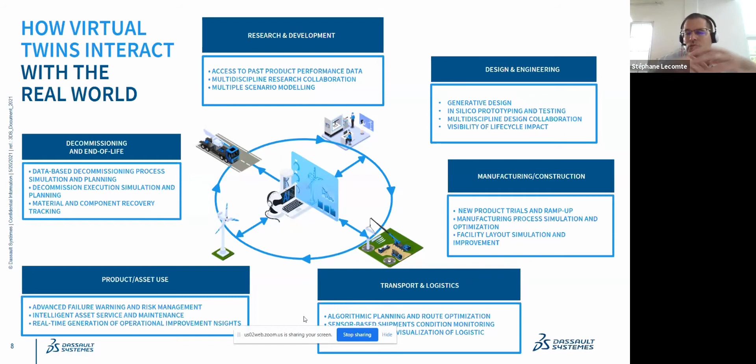And then you have some kind of system to help us do proactive and preventive maintenance, ensuring that you have access to the risk assessment and you can trigger some real-time information in order to have better insight into the operation of the asset itself. And of course, this virtual twin environment will help you take the decision to support the decommissioning of the asset as well as the end of life.

And as soon as you are able to ensure that you have access to lots of data, you can prepare the decommissioning of the end of life of the asset earlier in the design process. Okay, so this twin has a positive impact on the different aspects of what you want to do.

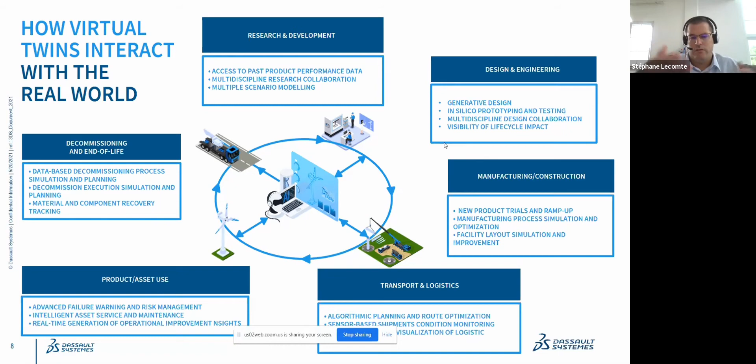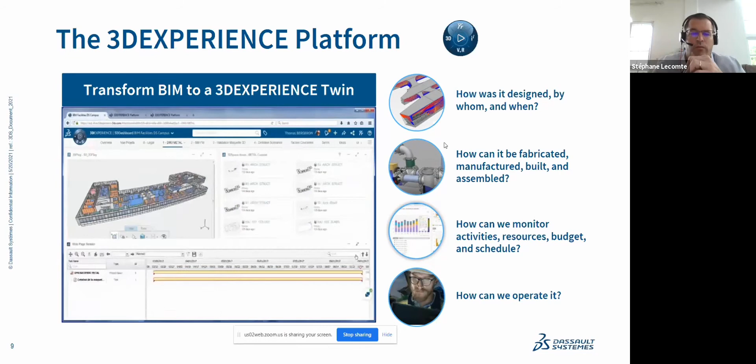As an example, here we are showing you that in order to leverage this twin, of course, you have access to a 3D digital environment in order for you to understand the way it has been designed. Okay, so you have access to a geolocalized environment. You can zoom from the building level, the city level, the district level, and you have all the multiple domains that are interconnected. So you mix the 2D environment, the 3D environment, the project environment, and you have access to the different KPIs in order to help you to decide what are the best suppliers, the best contractor you need to work with in order to deploy and fabricate what has been planned.

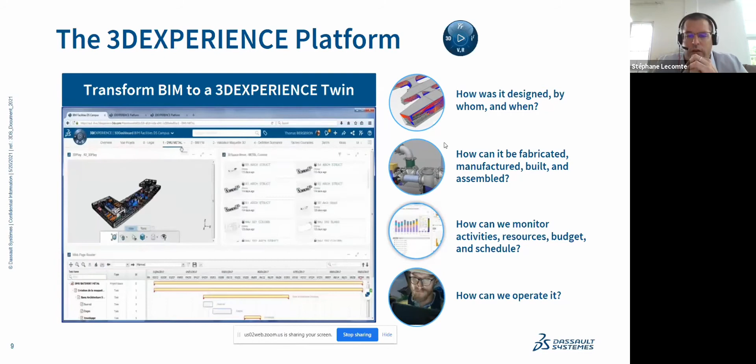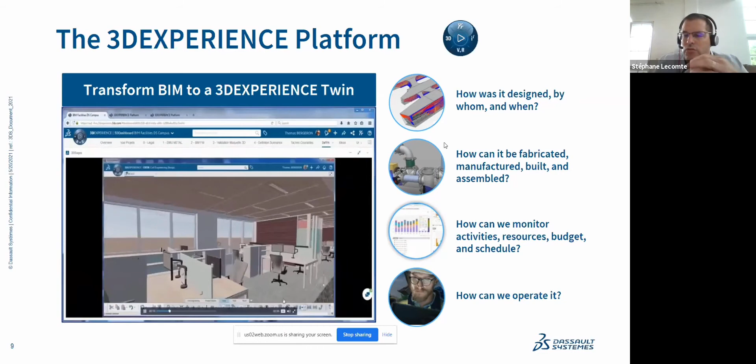Okay, you can see here, you can navigate with a high level of detail at the level of the equipment, and you can trigger some work instruction in order to ensure that you can afterwards operate it. So you have the multiple levels of detail, you have the multiple information. You can connect the virtual world with the real world. So here you have the real asset, the real pump, and you ensure that you can connect this real asset to the virtual twin, and you can do some virtual training, virtual commissioning, and you can understand the way it has been done.

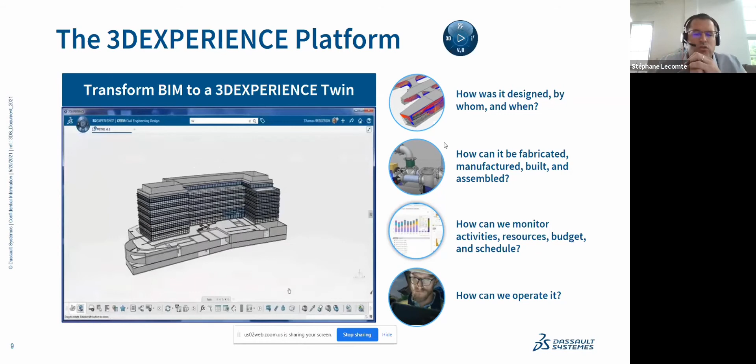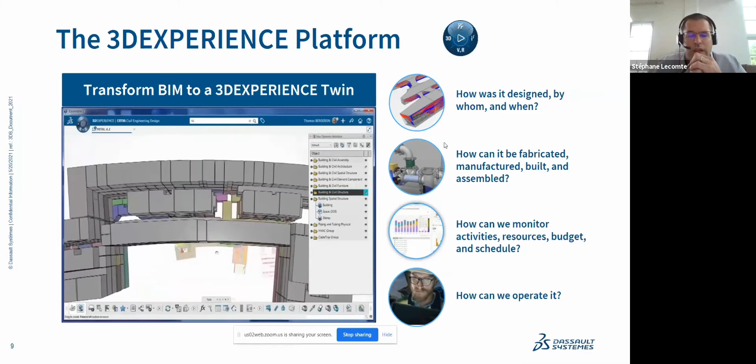Okay. After, the goal of this virtual environment is to support the next generation and to support the ideation in terms of a new generation of equipment. Okay, so here again, through the virtual twin, you have access to the different equipment. You can isolate some element, you can validate some other element, and here you have access to different zoning on the way it has been done.

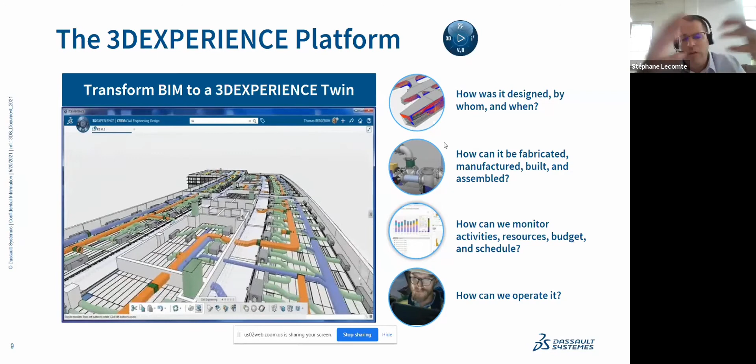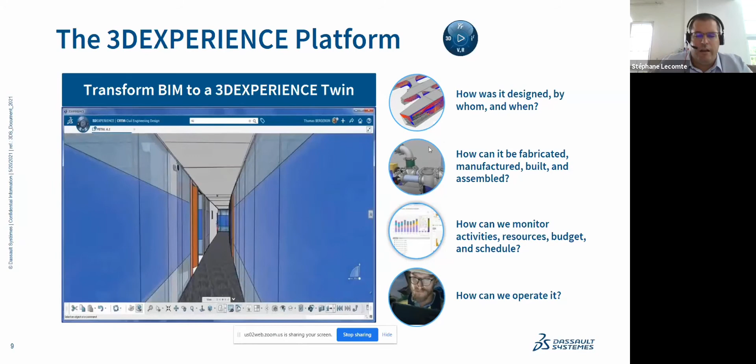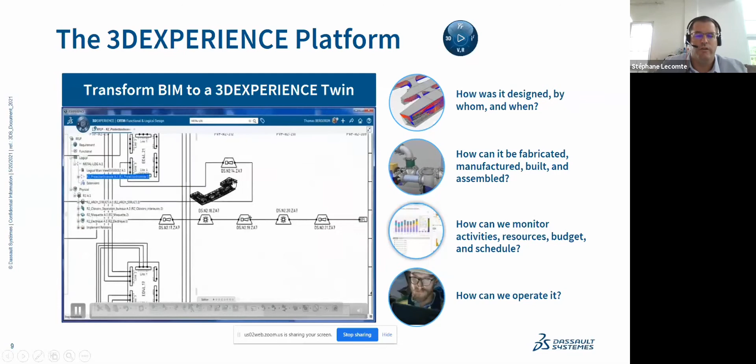Okay, and after that, in this digital mockup, you can have a virtual navigation in order to do this kind of measurement, to do this kind of simulation, and in order to navigate here in the HVAC system at the level of the building. Okay, so everything here is done in such a way that this virtual twin is interacting with the different systems. So here you have the different safety equipment, you have different pump network, you have the safety alert, and after you are able, through this digital twin, to leverage the way you want to operate it.

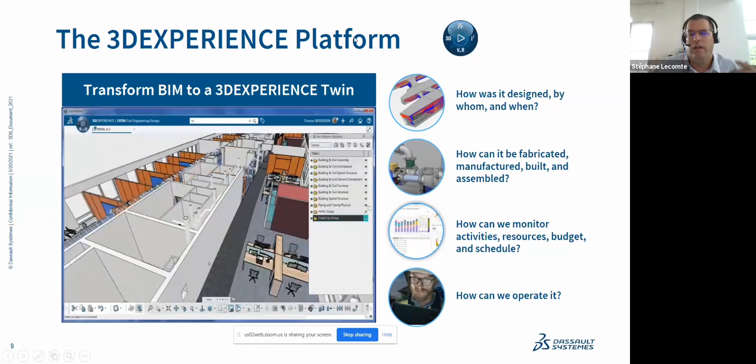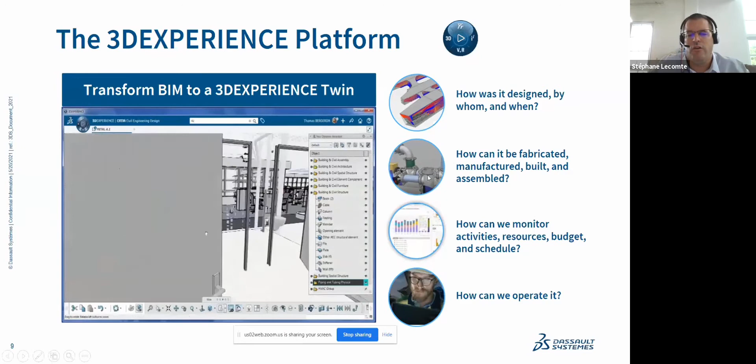Okay, so takeaway, the twin enables you to understand the way it has been designed. It enables you to understand the way you will manufacture it and the way it has been built, in order to ensure that you can optimize the way you will operate it, in order to monitor the activities, in order to have at the end of the day a positive impact on the way you will operate it.

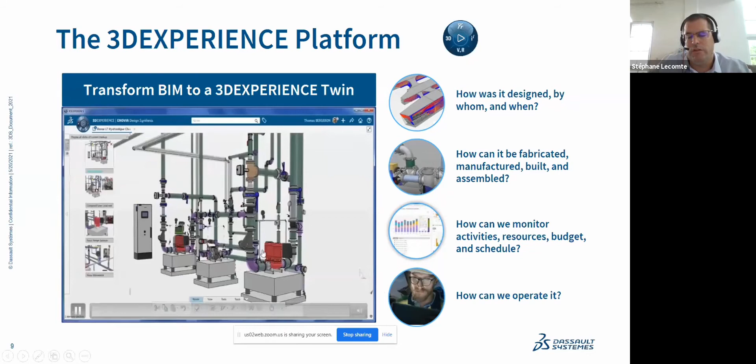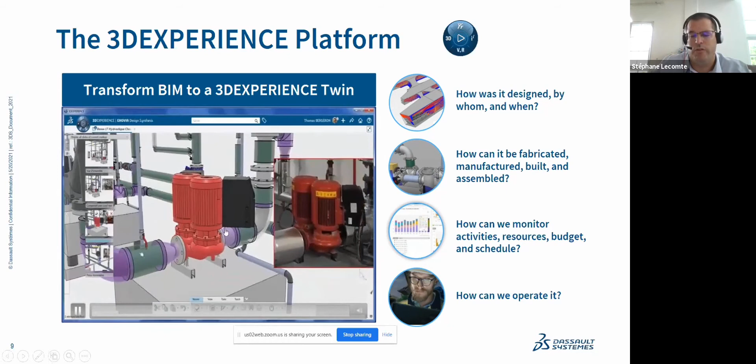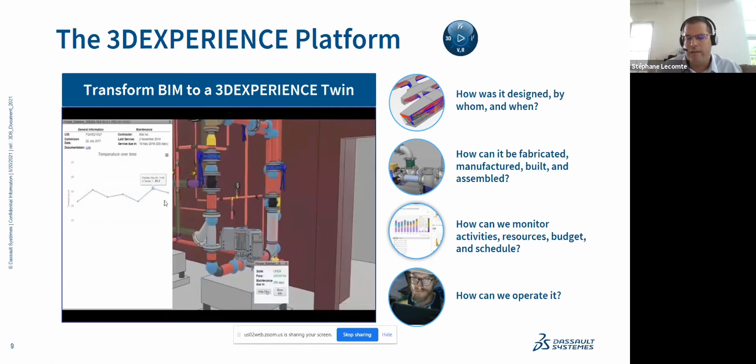So here you see the virtual twin of the pump system, the physical pump, and you can simulate in the virtual environment the real behavior of this equipment, including all the maintenance, the operation, and the simulation in order to validate some KPIs. So here you are simulating the behavior of this water network system thanks to the pump. And here you can see that you can trigger connecting to the IoT platform. So you can detect some pattern in order to optimize the maintenance and operation of this asset.

Okay, so when you have this twin approach, and when you are leveraging the building information model, this 3DEXPERIENCE twin enables you to do the lifecycle management of this BIM in order to ensure that you have a digital continuity from conception up to operation and recycling, or commissioning, decommissioning. At Dassault Systèmes, we are considering that in order to be efficient on this virtual twin definition supporting the lifecycle management, we need to have 4 domains. Those 4 domains are supporting the sustainable development of the cities, the district, the equipment, or the asset.

And there is a huge impact that we'll not detail today, but there is a huge prerequisite on the regulatory compliance, most often defined at the government level. Okay, so they are defining guidelines, rules, in order for us to digitalize the process and the rules in order to validate an infrastructure, a construction, or utilities network. And it's very interesting because as soon as you capture those rules, you can do a generative approach in order to support the twin of the infrastructure, the twin of the construction, and the twin of the utilities.

Leveraging collaboration between the different engineering procurement company, as well as the owner, the general contractor, the global contractor, and the detail contractor. Okay, so as soon as you have those 4 elements, what is very interesting is that, if we look at the infrastructure, this twin is enabling 4 values, at least 4 values.

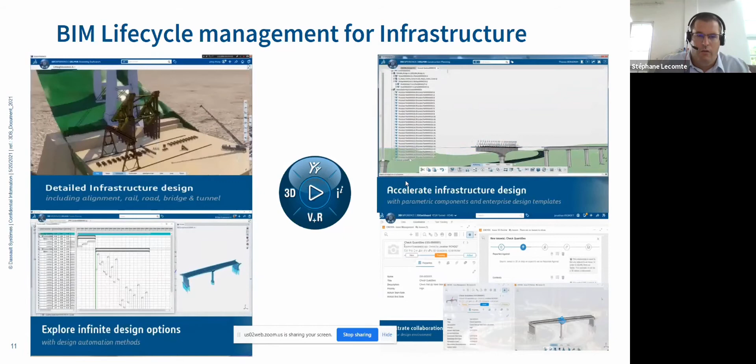So at the infrastructure level, the twin is an environment whereby you connect all the domains, all the disciplines, and it enables you to take the decision to ensure that you can define this infrastructure network made of bridges, tunnels, and roads.

When you look at the construction level, again, remember what we said for the twin. You have an impact on the design and simulation. So you need to have the context, the design, you ensure that you can build it. After, we are there to sell what has been planned. So we need to do the marketing and up to the operation.

Okay. So this virtual twin enables you to give some kind of high level simulation based on the different mixed use strategies that you can have. And the virtual twin will propose some different strategies to develop a land lot in order to ensure that you can be compliant to the land use of what you are developing for the construction, as well as to support the need for the population to reach this new district.

And based on the different elements that you can do from your concept, what we're proposing is a total digital continuity through this virtual twin from the context, the conceptual design, the detailed design, up to the building, the very detailed design of the different elements, up to the equipment level, including the definition of new materials.

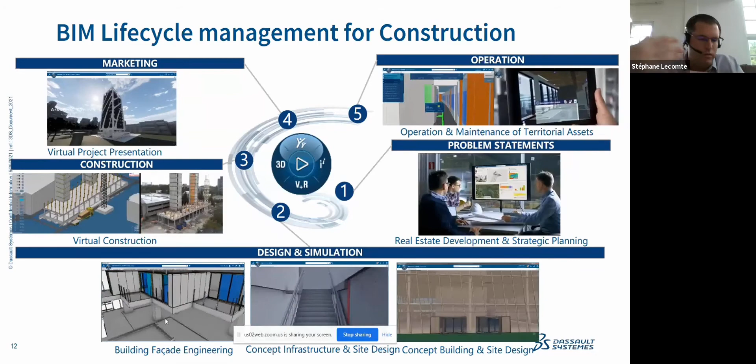And that can be at the story level, the room level, building level, as well as the district level. Okay, so here, I will say, it's quite straightforward because steps 1 to 4 we did many times in other industries such as the automotive industry and aerospace industry. So from problem statement up to the marketing.

What is very interesting at the construction level is that as soon as you have this digital virtual twin, you can connect it with the different IoT platforms, and you can provide access to a cockpit that enables you to simulate the behavior of your building, your facilities when in operation.

Okay, so we are not a command and control center. It's not real time. It's near real time. After, it's a parameter. But what is very interesting is that you can connect with the different IoT platforms in order to simulate what will be the most efficient operation at the construction level.

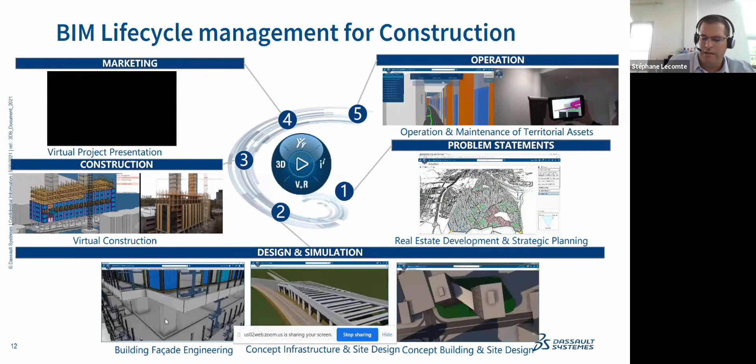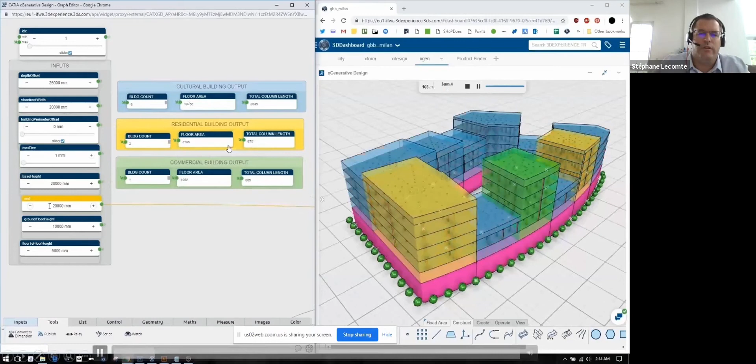Last but not least, as soon as you become more and more mature, and because you are capturing the rules, you can have access ultimately to this kind of environment, whereby on the left part you have your rules engine. Here you are simulating the mixed use in terms of the cultural impact, the residential impact, and the commercial impact. And after, you have a direct impact of those KPIs, those rules on your design at the building level, at the district level.

In this example, we are zooming in. It has been done in a matter of days, during a 2 days hackathon, in order to refurbish some area of Milano. So here you have the as-is Milano with some transportation network, some isochrones. And here you have the to-be as computed by the system in order to propose different means of development for different districts.

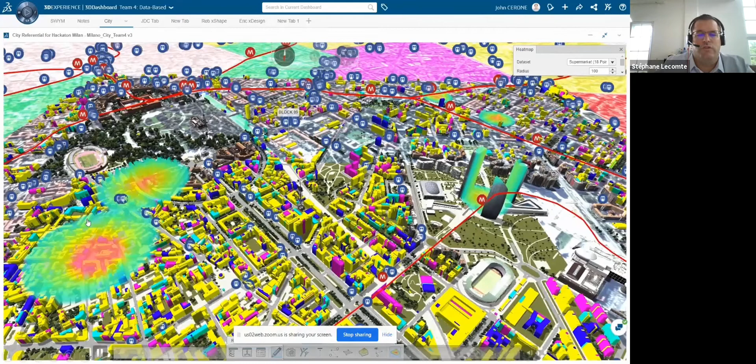So you can see that here, if I'm going back, here you have the existing as-is district with the different transportation networks, the different isochrones in order to ensure that we can connect. And here, based on the land lot that you want to develop, you have access to your proposed new development in the context of the existing city.

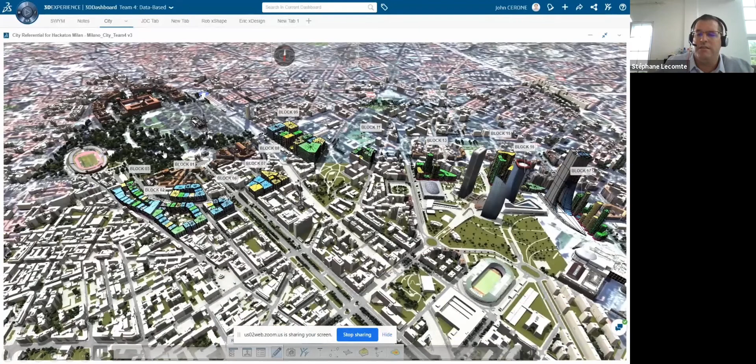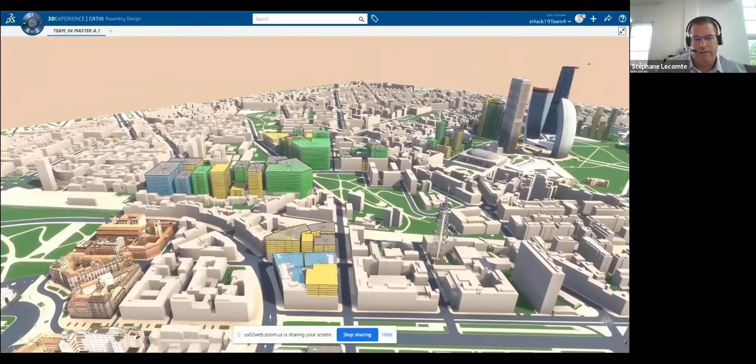And after, you can simulate the entire city, the entire district, the entire environment, connecting the buildings, the facilities, the infrastructure, the utilities. Okay. The utilities, I think it's the same concept, but can be more tricky because you have access to different elements and different granularity of information, different quality of the information.

So here, if you look at the different elements on the screen, this one is very interesting because when we partner with some energy provider, we can define a cockpit to monitor the efficiency. We can predict what will be the impact in terms of energy consumption at the district level based on different strategies. If I remember well, I think 40% of the energy is consumed by the buildings at the city level. So as soon as we can optimize that, we are ensuring that based on the different density at the district level.

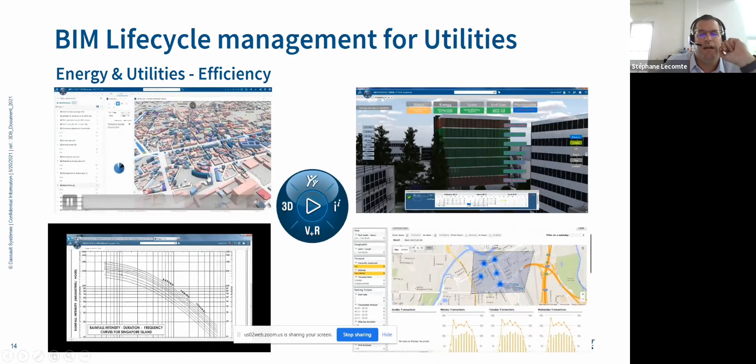So here, what is very interesting is you are monitoring the energy at the district level, and here you have the same kind of cockpit, but here you are more at the building and at the layer level, at the floor level. So when you are combining the two, you have a kind of multi-scale environment whereby you can zoom at the different levels of detail.

So here at the energy, you have the occupancy, things like that, and you can connect with different IoT providers in order for us to ensure that we can optimize the way we are operating the buildings. Okay, so in terms of light, energy consumption, water preservation, whatever.

This example here is very interesting. The top layer is on the energy, but what is interesting at the city level as well is that you can have an impact through the virtual twin on the way you are managing the water.

So you can simulate some rainfalls, and you can reuse, in fact, the knowledge that you capture based on the rainfall in order to define your water, your drain and your different water networks. Okay, so the utilities for energy, the water and the sewage, and you can also use some dashboarding capabilities. Here it's something we did with Parkeon, so we are a bit far from the utilities, but it's how to optimize the parking lot.

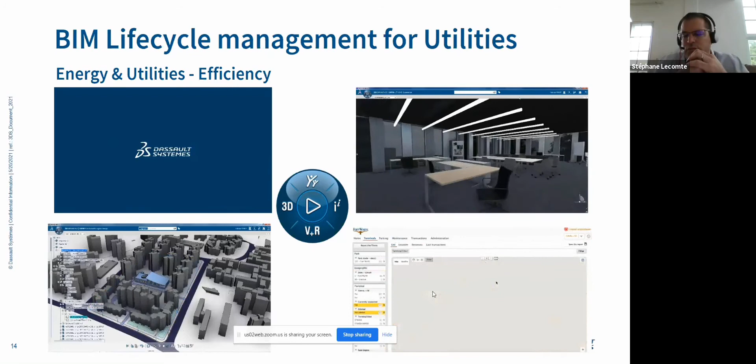And you have a dynamic pricing strategy based on different criteria. Okay, so here you have different aspects of the virtual twin, and those impacts are very interesting because as soon as you capture the behavior of your asset, after you can predict and you can ensure that you capture your goals, your KPIs, and you can monitor the way you plan the city.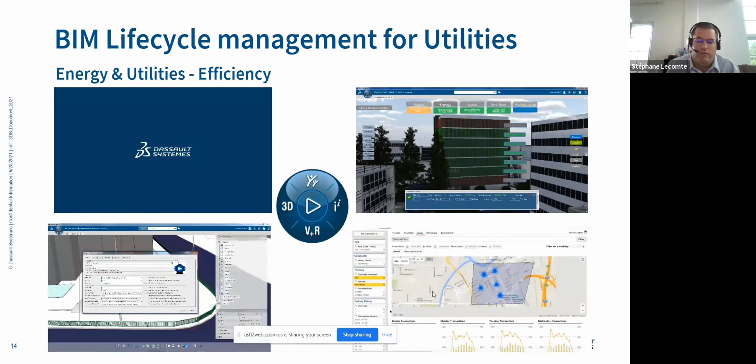What we can see as well by leveraging the virtual twin is when you have a green strategy at the asset level, at the building level, at the district level, it's very interesting to see that a building can be green when in operation, but if you look at the entire lifespan of your building, of your asset, of your network, and if you take into consideration what you did during the pre-phase in terms of excavation, the impact on the environment, maybe you are not so green at the end of the journey. Okay, so some examples of the benefit of the twin in the operation.

And last but not least, I hope I was clear, when you are doing this twin, you have three main phases for anything, the asset, the construction, the infrastructure, or the utilities. You have a virtual twin supporting the design, a virtual twin supporting the construction, and a virtual twin supporting the operation. Okay, and you have an example of the lifespan and the impact on the cost.

And what is very interesting as well, when you generate this virtual twin approach, you can see that you have impact on some sustainable KPIs, such as the quality of the design with some collaborative engineering practice. You can increase your win rate because you are more accurate in the way you are defining your cost and the building, and you can increase your customer satisfaction because you are sharing with your customer a 3D representation of what you have in mind. Okay, so you are using 3D as a common language.

When you zoom on the construction, that is representing 20% of the saving on the lifespan of a project, you can ensure that you have a positive impact on the execution of the project on time and on budget. You can input new innovative ways to deal with the product portfolio and ensure that what has been designed is effectively built. Because you have this virtual twin, you can identify the risk early, and you can capitalize and standardize so that the errors you detect during this construction plan, you will not redo.

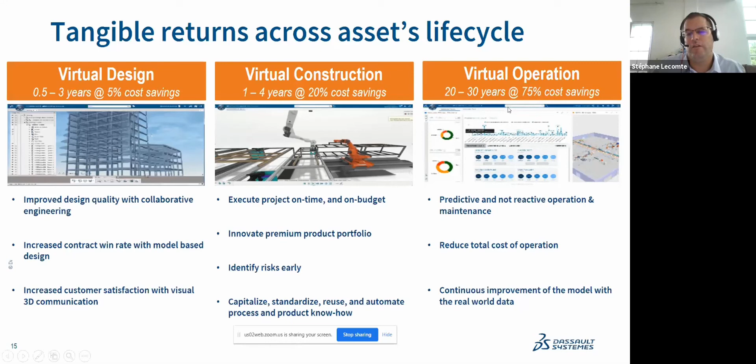When in operation, when we connect and partner with some very famous actors on the market for the energy, the utilities, the IoT providers, we have algorithms to optimize and be more accurate in the way we are dealing with predictive and not reactive operation for the maintenance. We have positive impact on the total cost for the operation, and we are ensuring through this virtual twin that we have a continuous improvement loop, because we are able to feed the virtual environment from the real world in order to give new input at the design level.

Okay, so this is the end of my presentation. If you have any question, I'm ready to answer your question.

Hey, Stéphane, it was super interesting. Thank you so much for the presentation. I was really amazed by the pump and how you can see it, virtually and in reality. It's really impressive. How do you create the twin, though, when you don't have digital data?

Very interesting question, because as you can see in the presentation, we created the twin because we were early in the design. Okay, so we were able to capture 3D data. So we have many ways to build this virtual twin, and we have a kind of ramp up. And the twin is not necessarily 3D. The twin can be the document, the referential of the operation, the referential of the documentation, and after, we have many strategies. If you have PDF data, if you have 2D layout, then we can try to build a 3D representation. We are as well able to do some scanning.

Okay, so you will tell me that scanning the construction of a bridge is easier than scanning something that is in the ground, but we have many ways to acquire the data, and the goal is to have a proper strategy and the proper trade-off between what can be acquired in terms of data, whatever the granularity or the quality of the data, in order to build the referential.